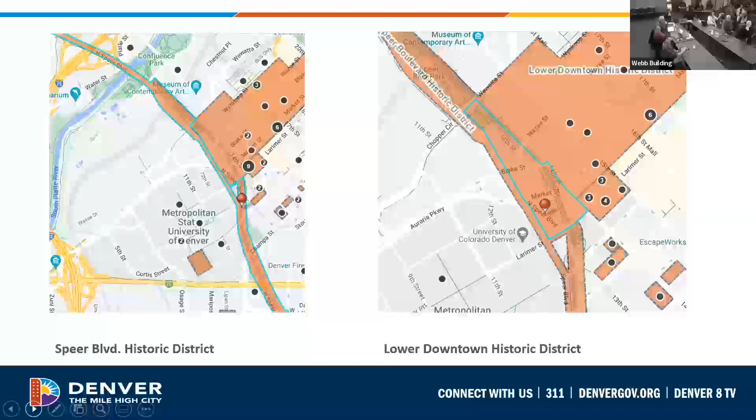I want to talk a little bit today, because these are not areas that either commission deals with a whole lot, about what the existing guidelines are that would form your basis for review, and a little bit about what that review process would look like.

Interestingly, both the Lower Downtown Historic District and the Speer Boulevard Historic District were both designated in 1988. Cherry Creek and the adjacent parcels from Larimer to Wewatta are within the Lodo district. So the boundaries are a little odd as far as what was incorporated into the Speer district versus what was incorporated into the Lodo district.

This project would fall within the Special Review District 4 of the Lodo district, in sub areas 5 and 6. So review would be based on the designation application, the ordinance, design guidelines for the Lower Downtown Historic District, as well as, more specifically, the design guidelines for Special Review District 4.

The general design guidelines for Lower Downtown don't address much as far as this type of construction. They do have general guidance on new construction which would be applicable—buildings shall be designed such that their massing is consistent and compatible with the historic context, and a building's materials, details, and colors are important factors in establishing its compatibility with its context.

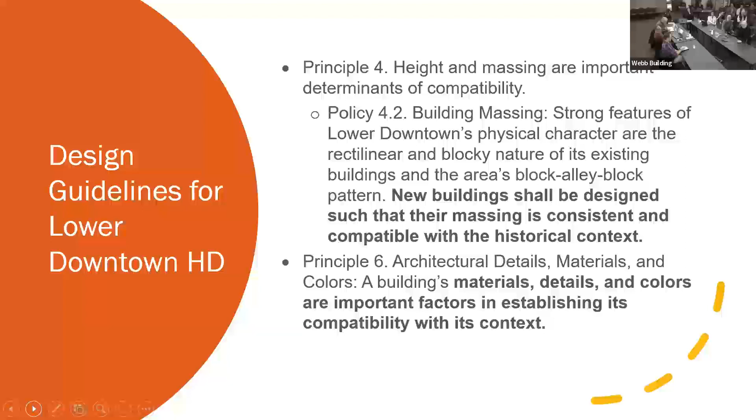The design guidelines for the 4th Special Review District provide a lot more specific guidance for this site. The vision statement looks at the big picture for the 4th Special Review District, saying the district should look holistically at the whole Cherry Creek and Speer Boulevard, so that characteristics integral to the experience of Speer Boulevard be furthered through development of these parcels, and that new construction should emphasize the continuity of the parkway environment, as well as providing connections beyond the parkway edges to the neighboring urban context of the historic district, Cherry Creek, and the Auraria campus.

So though you will be specifically reviewing what is within the footprint of the district, these guidelines say that you should be looking larger at how the connectivity is proposed, looking at connections to Speer Boulevard and across the area and downtown. So it gives you that scope—even though you'll only be reviewing a portion of it, you can look to see how you think it's fitting within that larger scope.

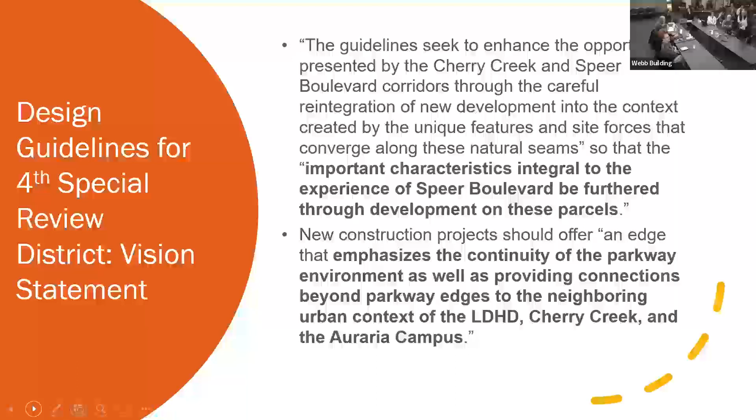The guidelines specifically say that when you're thinking about context, it shall not be limited solely to contributing buildings in the Lower Downtown Historic District. You can also be thinking about Cherry Creek, Speer Boulevard, connections to Auraria, as well as the Lower Downtown Historic District. So you're not just limited to thinking about LoDo when considering what's compatible and how it relates to the context.

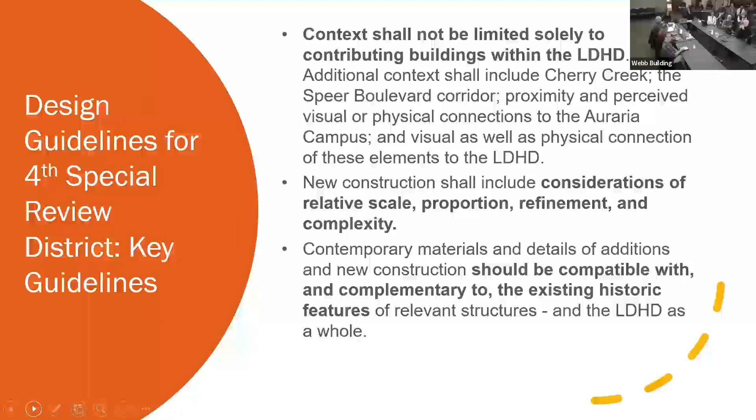The guidelines say that new construction shall include considerations of relative scale, proportion, refinement, complexity, and contemporary materials and details. New construction should be compatible with and complementary to the existing historic features of relevant structures, as well as the district as a whole.

So just to give you a little idea of how the rest of the project will be reviewed, and the guidelines for the Speer portion: Speer Boulevard Historic District was also designated in 1988. It extends from First Avenue down by the Country Club up to Irving Street in Highlands, and it has a period of significance from 1904 through 1957.

For the Speer Boulevard Historic District, the LPC will be looking at the designation application, the ordinance, their general design guidelines, and then they also have specific guidelines for Speer Boulevard and Cherry Creek. These design guidelines were developed in conjunction with the designation and were adopted by LPC in 1988, but they haven't gotten a whole lot of use so far, because there hasn't been a lot proposed.

The vision for these guidelines is that the purpose of establishing design guidelines for this significant and historic parkway is to revitalize the civic and historic quality of the boulevard, and to ensure that this quality is restored and maintained over time.

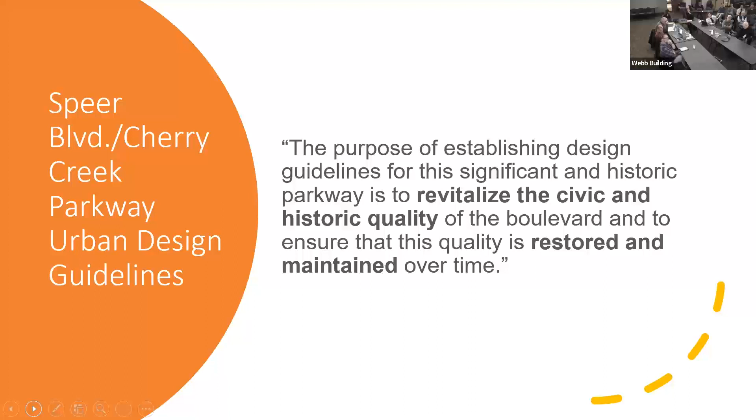The guidelines specify the key character-defining features of the boulevard that should either be retained or restored where missing: that the boulevard should be linear, formal in character, uniform, that there should be a series of promenades, that there should be a pedestrian scale, that water should remain a prominent feature, and that the design should be classically influenced.

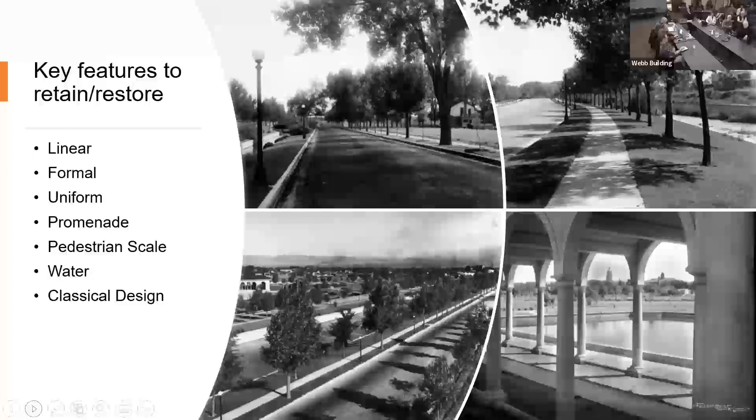Some of the key guidelines from those Speer Boulevard guidelines: any work should maintain, enhance, and revitalize the historic classical image exemplified by the City Beautiful movement. The overall character, design, and maintenance should be consistent and uniform and should reinforce the image of the parkway as part of the historic Denver Park and Parkway system.

The boulevard should maintain a uniform pattern both within the site and in relation to the design of the park and parkway system. Those guidelines talk a lot about how it should continue to read as a unified linear resource, that it shouldn't be broken up into sections that have different character, but should all have that City Beautiful character.

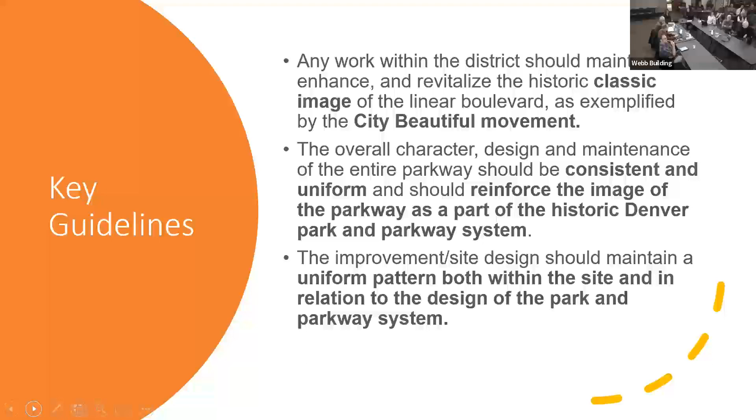So that is it, just a quick overview there.

When I talked to the commission about this, they're really interested in seeing how the reviews go. Though each group will review it separately, each commission could at least hear what the other is thinking. We're working with Adam and Nate to see if there are options to call a joint meeting, so that some presentations and discussion could be heard as a whole by both commissions, and then each could divide up and make their own decisions, but still hear the same information. We're still exploring what our options are under the ordinance and what that would look like, but the commission really would like the opportunity for both commissions to be together to discuss this. Any questions for me about the process or guidelines?

My first question was about whether we could do joint meetings, and I just want to voice my support for that, because I would hate to put the project team in a position where they're getting conflicting approvals, which could drag this on for months and months.

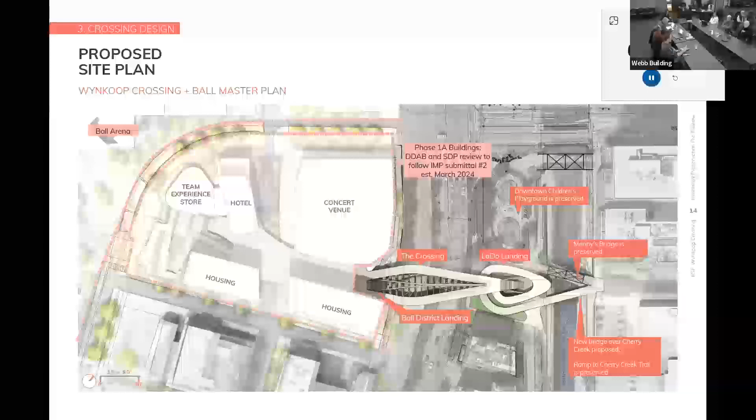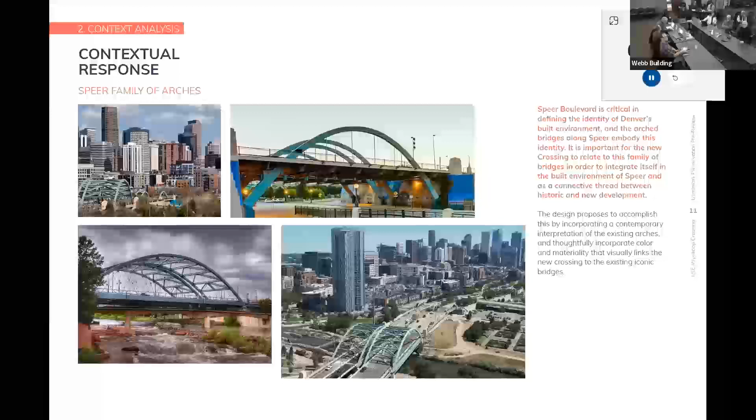As it crosses Speer, the primary identity of Speer, and in some ways of our downtown environment, is the family of arches that already exists. There are many ways to design a bridge, but we believe this structural system is the most appropriate to reflect and continue the identity of the Speer Parkway as we cross. You can see here that one way we achieve this clear span of 160 feet is an arch, similar to the other arches of Speer.

One of the things that's been a critical objective of ours is to allow future changes on Speer that we've all discussed, perhaps different movements of vehicles and pedestrians, without getting in the way. So we allow flexibility over time. We are free spanning the 160-foot right of way without any structure coming down on the median, and this arch allows us to do that.

On the ball arena side, we land approximately 23 feet above the Speer environment, so that services and other activities happen below and can be out of sight. In the ball district, it's a very unique site with unique constraints, and this allows us to almost create a kind of backdoor where we don't have alleys and other service areas.

On the left, which we're all here to discuss, is a sloped ramp, sloped just under 5% to allow universal access without elevators. There are no elevators proposed to access this bridge, only stairs and ramps on both sides. Hopefully this slide depicts the lightest touch possible in all of these environments. We've discussed the characteristics of the Lodo Historic District, which are primarily masonry, load-bearing buildings. We believe this structure, being as light and thin as possible, allows those structures to remain the identity of the district.

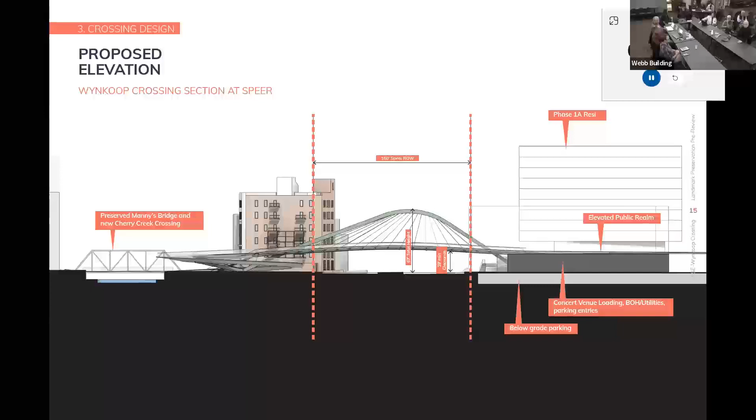Next slide, I'll try to go through these quickly. This describes the componentry of the bridge. The capacity Chris mentioned requires a pretty significant width of structure, and we're proposing two 18-foot wide pathways, not designated. Both are allowable for pedestrians, bicyclists, and scooters, and are fully accessible, rather than combining them into one wide pathway, which could achieve the capacity for many thousands of people leaving an event. We intentionally pulled them apart to allow more daylight, less obstruction to the qualitative environment of the Speer Parkway.

We've talked about the bridge, and then what we lovingly call the paperclip, or the corkscrew, is the tightest possible ramp which can also comply with certain municipal code turning criteria, meaning there are radiuses that allow a bicyclist or scooter to ride up comfortably. As I mentioned, it's less than 5%, so we do not require landings, and there's a central stair.

And then finally, over the creek, the capacity does not exist with the existing Manny's Trestle Bridge, so we are adding to that, but with as light and thin a crossing as possible. In a sense, a sidewalk, an 18-foot wide sidewalk with a railing on each side. It happens to cross the creek, but it is as visually minimal as possible.

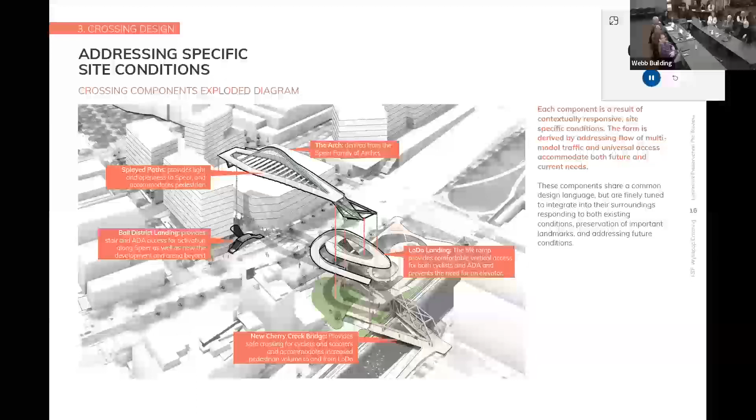This is just showing it all together and gives you a sense of the continuity of context of Speer, which crosses below. And as we sit between the Volker Lofts on the Lodo side and the children's playground, which we can discuss in more detail as we move forward.

We have some before and afters. This is looking towards the mountains along Speer. You can see on the left the existing conditions. It's been critical to not interrupt that parkway environment, the landscape median which is so characteristic of Speer, and also land appropriately on both sides while allowing not only the existing pedestrian realm, but its expansion in the future.

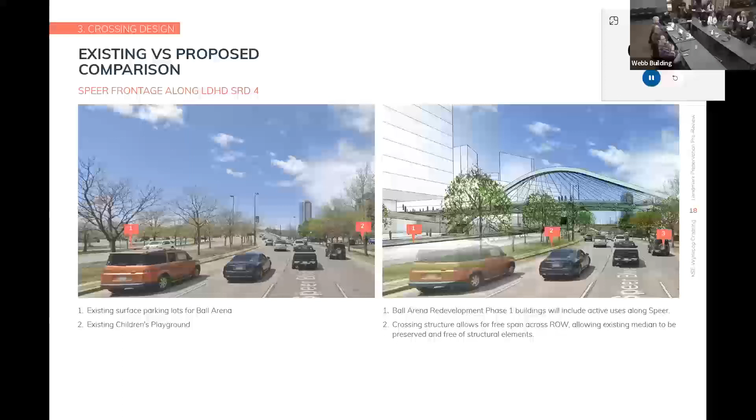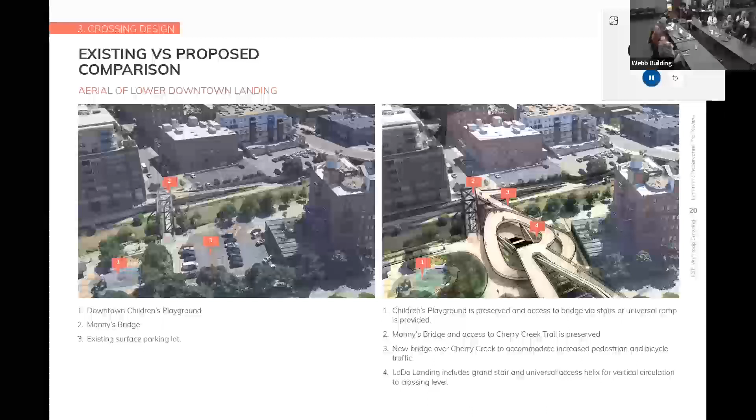This shows the existing conditions around the paperclip. We are setting both the stairway directly on axis with Wynkoop and a prominent overlook point which sticks its nose out over the creek to look up and down, so that one is connected as much as possible, both visually and physically, to this rich environment.

The arch is also directly on axis with Wynkoop, so that the bridge acts as a wayfinding device while in the Lodo district. It can be as visible as possible down the rights of way.

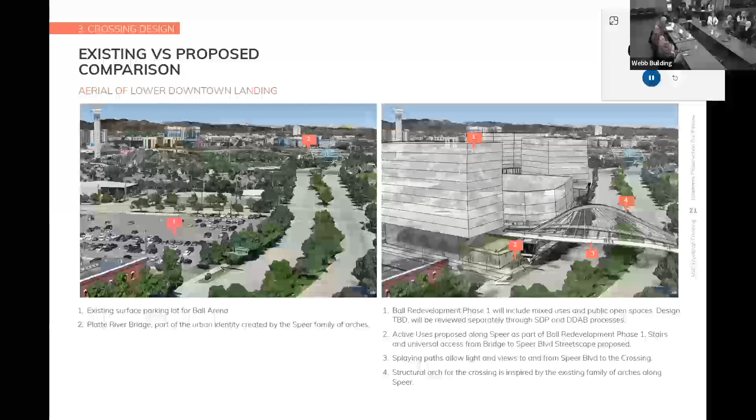Again, looking to the west, you can see the continuity of landscape and different ways in which the landing on the ball arena side has been carefully crafted to attract people to the right places. What was shown on another slide is an example of that: bringing people down stairways along the paths of pedestrian travel, not vehicular. The stairways will come down and connect to the existing sidewalks, the more lateral movement, rather than coming down from the bridge and putting one directly into the traffic flow.

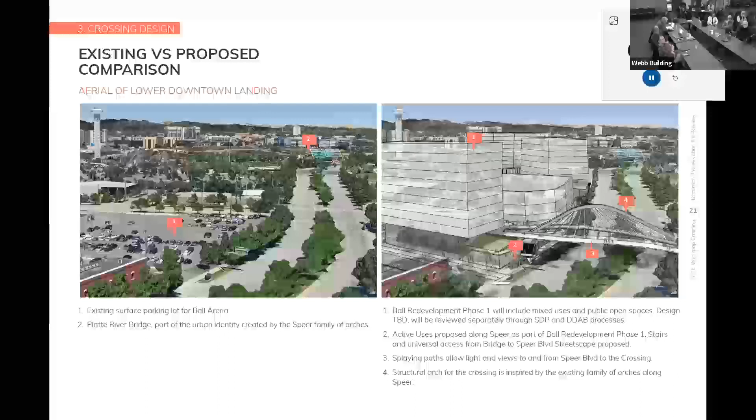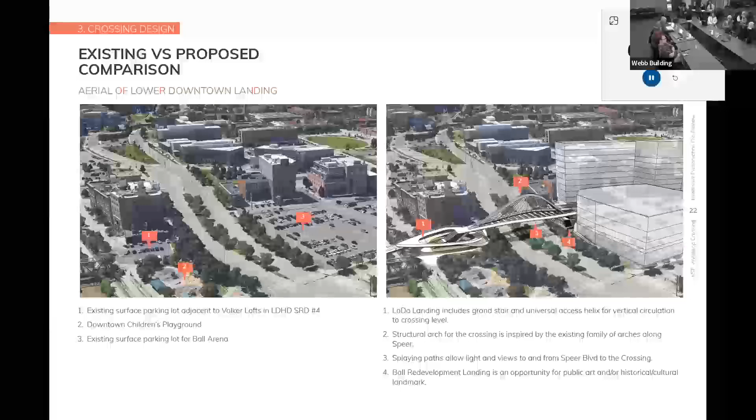This again shows what we hope you will agree is as light a touch as possible: a singular arch, a splayed deck which allows as much light as possible, and a concrete cast ramping system with minimal vertical support to increase visibility both across the crossing, but certainly of primary importance, as Chris mentioned, is the safety around this bridge, which is enhanced by visual connections and accessibility throughout.

You want to touch on this, Chris? I think Abby discussed these - we actually have 3 jurisdictions, by the way. We have a Downtown Design Advisory Board review for everything we're doing on ball, that's what you see in pink, which makes it even more interesting and fun. I won't go into the detail of this; I think Abby covered it adequately. I'm sure you'll have some discussion.

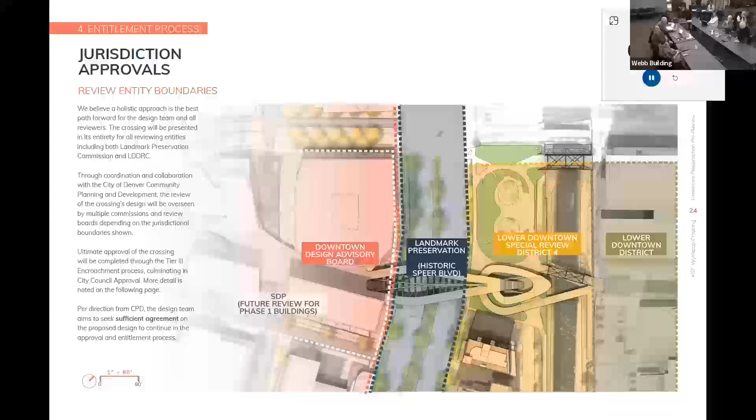I do agree, and we agree, that a joint review, although sort of unprecedented, would be helpful, because the point here is to do a great project, and whatever it takes to do that, we're on board with. Thank you very much. Any questions for the applicant?

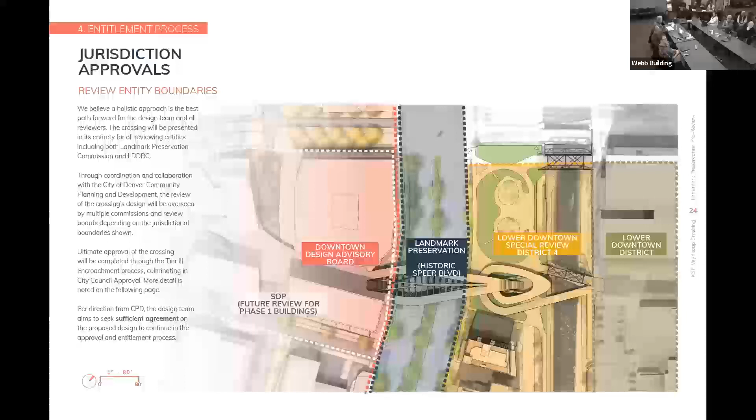Fred: I do have one question. The parcel that the paperclip is proposed on - in looking at it, I had a question about whether that site is developable otherwise. It looks like the access is fairly limited.

Well, it's a city property now. So I think it's true - I'll stick my neck out - I think if the city sold that property, it could be developed. And I think that's covered, I believe, in the overlay, is that right? It would be, yeah. I don't know the specifics, as we've only ever had the bell tower site come in. Yeah, but there are very specific requirements for each site within the fourth special review district.

I'll add a quick anecdote. Based on the special review district guidelines, technically it is developable. But in the community meetings we've had, specifically with our neighbors in the Volker Lofts, they made an interesting point about living in that building and seeing the development of the children's playground. A resident said they were very encouraged about where that playground was built in relation to the parking lot, because it basically ensured that land wouldn't be developed. Chances are slim.

Any? We're at a concept level design, correct? What's the likelihood of keeping this very tracery, light concrete ribbon ramp? Has that been thought about?

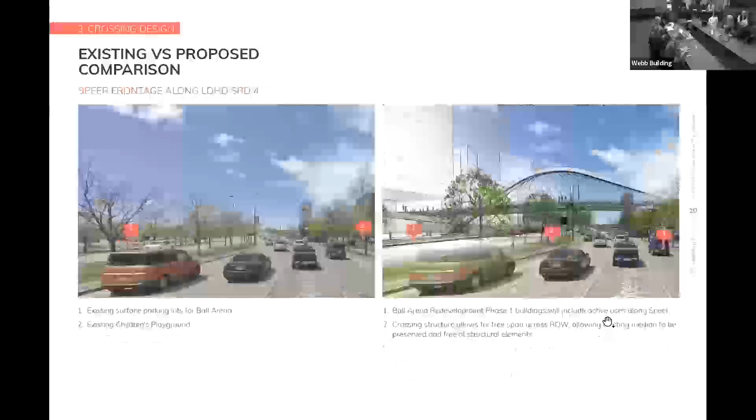Is that whole reconstruction subject to a lot of redevelopment on the west side of the river, or is that even included in your scope? I don't know that it's included in our scope, but the River Mile plan proposes two pedestrian bridges which connect over the highway, making that open space actually finally usable.

Rather than a parking lot.

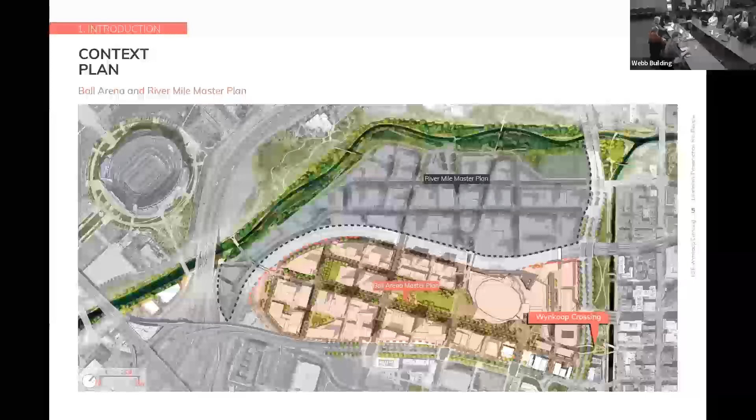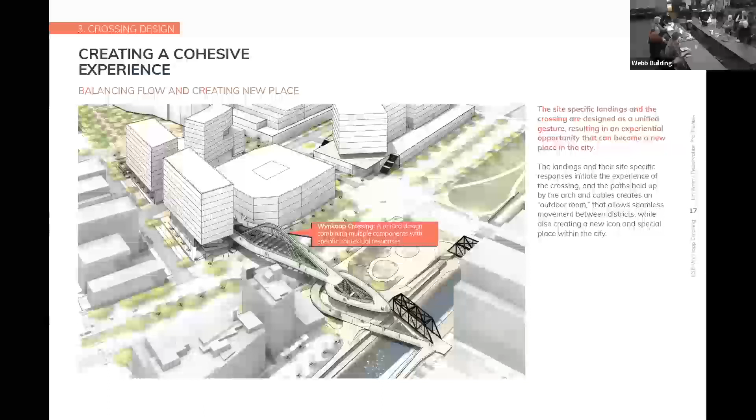What's the closest the paperclip gets to Manning's Bridge horizontally? Let me look at a plan. The closest is the right way to pose that question because it varies. I don't have the exact number, but we generally try to keep a minimum of six feet clearance from any existing structure.

Including this bridge, Minnie's Bridge, and the Volker Garage? Yes. And again, conceptual, but the theory there is that the width of a sidewalk is able to have clearance between anything, but also the visual impact as well.

Approximately, say the width of the circulation ribbon - is it 18 feet? Yes, at its widest, well not average, but it grows at what we described as the nose that projects over at 18 feet. So we have the stair that handles a lot of capacity and then the 18-foot pathway ribbon.

On the paperclip corkscrew, your guardrails are rendered as a transparent material. Is that intended to be what you're carrying forward, not some sort of metal picket? Conceptually, to evoke that it is going to be transparent and light, but not glass necessarily.

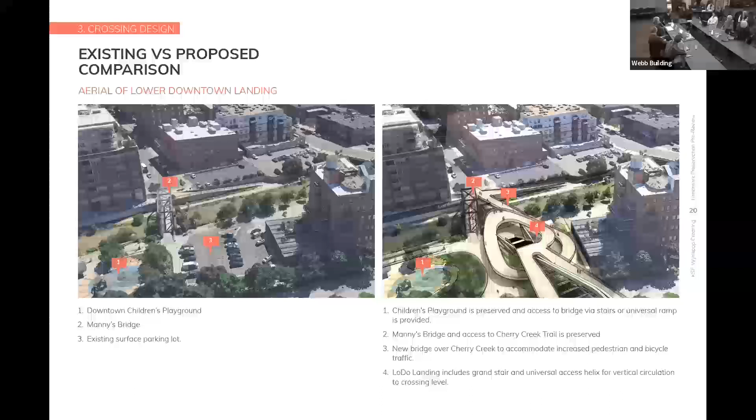I looked into the packet and it wasn't conclusive. It just said historic bridge, but I think we fall into the trap of anything over a certain age becomes historic, whether or not it's actually in the ordinances. We'll probably have to look at the National Register to dig into that - it's probably not in the ordinance, not called out as such.

Well, if there are no further questions, let's open this up for discussion. Curious to see what everybody thinks. Fred, sure, you always look like you have something to say. I'm always happy to be first, as I've sat there while everybody kind of goes, oh, you first.

So a couple of things. One is that I very much look forward to the presentation about the work the city's doing on Cherry Creek visioning, because I think that context will be very important for us as we consider this. I do have concerns about the developability of the site where the paperclip is proposed.

It has one access, and I think you have to wonder where that conversation would go with DFD long range. So that leads me to think that a civic, public-serving piece of infrastructure like this becomes very appropriate on that site, because I'm not sure that we're going to do much better otherwise than a parking lot.

I think we're going to get into design details eventually, and I recognize that this is conceptual, so I'm not going to dive into that because I think that'll come down the road. But what's important to me is the issues of connection and the relationships, things like celebrating the creek experience and maintaining physical and visual connections to the creek, considering the importance of connectivity.